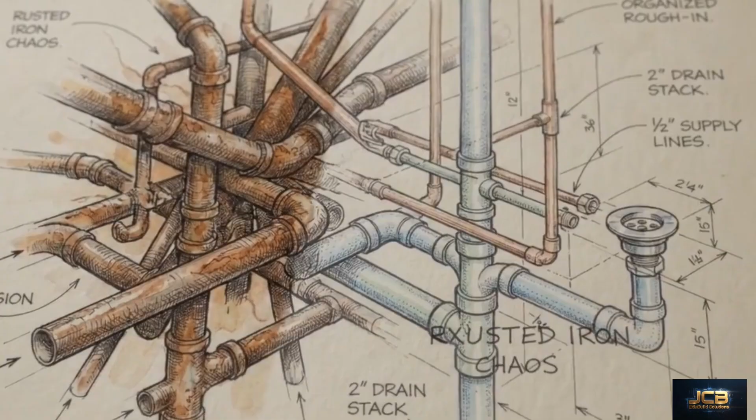A plumbing system built from unverified, unmarked pipes carries the constant, invisible risk of a sudden, catastrophic rupture.

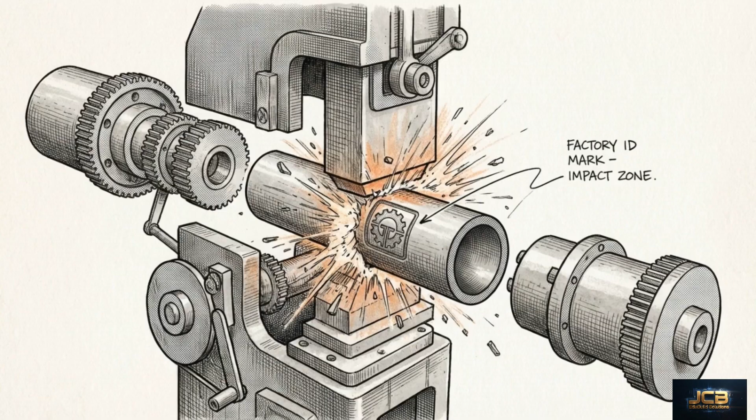Chapter 14 functions as a logical system, where the specific application of a material dictates its required physical properties. We begin with the first column, identification. Material compliance begins at the factory, long before the components ever reach the job site. Section 1401.1 establishes the baseline requirement. All pipes, fittings, and fixtures in a plumbing system must be free from defects.

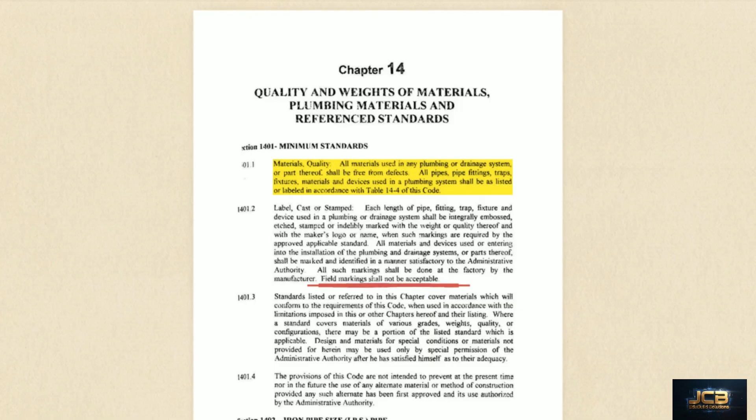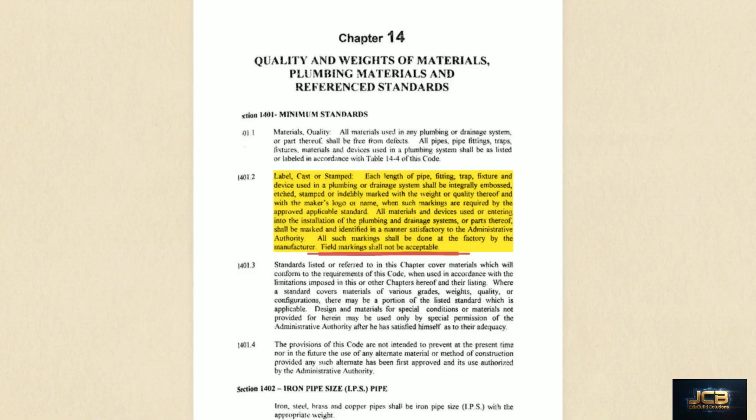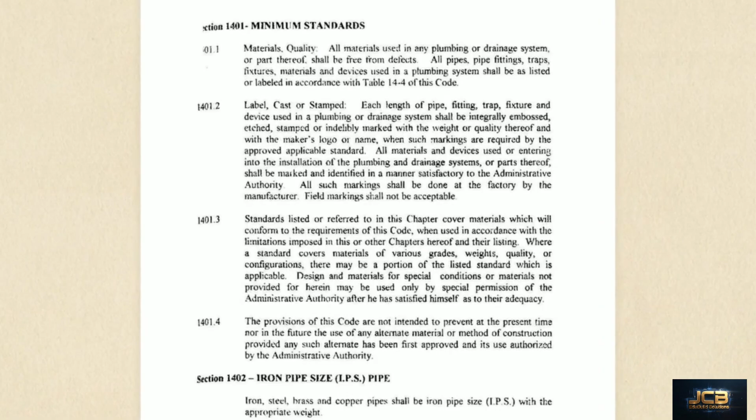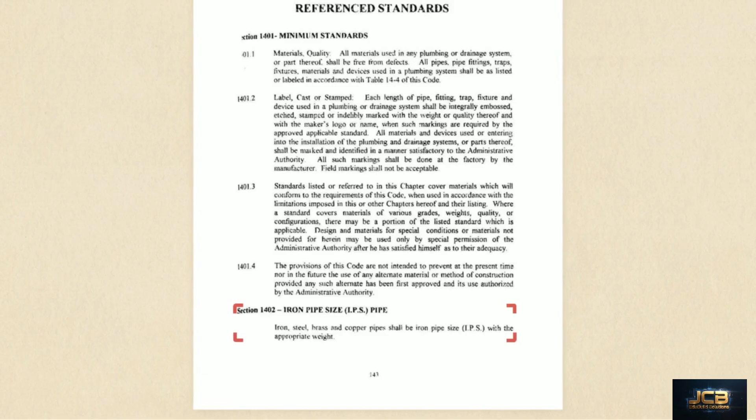According to Section 1401.2, every component requires an integral factory-applied stamp or logo that identifies its weight and quality. This is a critical point for the exam. Field markings are strictly invalid. If the identification wasn't applied at the factory, the material is a high-risk liability. Section 1402 introduces the iron pipe size, or IPS, standard. All iron, steel, brass, and copper pipes must conform to these universal dimensional and weight baselines.

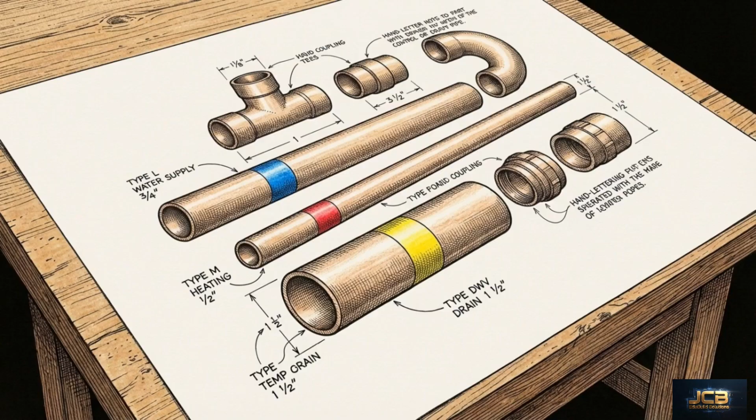We can now lock our first column. Identification requires a factory stamp and IPS weight conformity. Without these factory-verified markings, a material cannot prove its origin or its ability to meet the code's safety thresholds. Next, we move to column 2, specific materials. In Section 1403, we see that for copper tubing, the color of the factory stripe determines its legal use.

Section 1403.4 mandates a continuous, indelibly colored stripe for hard-drawn copper, green for type K, blue for type L, red for type M, and yellow for type DWV. For drainage and vent piping, Section 1403.1 permits type DWV copper, which is identified by the yellow stripe. Potable water supply requires a heavier wall thickness to withstand pressure. Section 1403.3 sets type L, the blue stripe, as the minimum requirement.

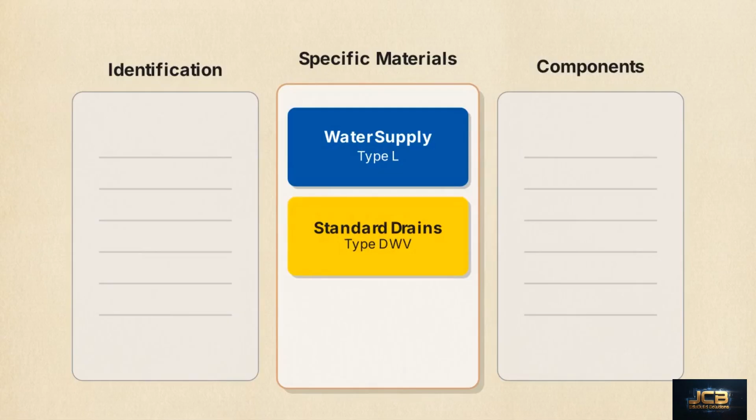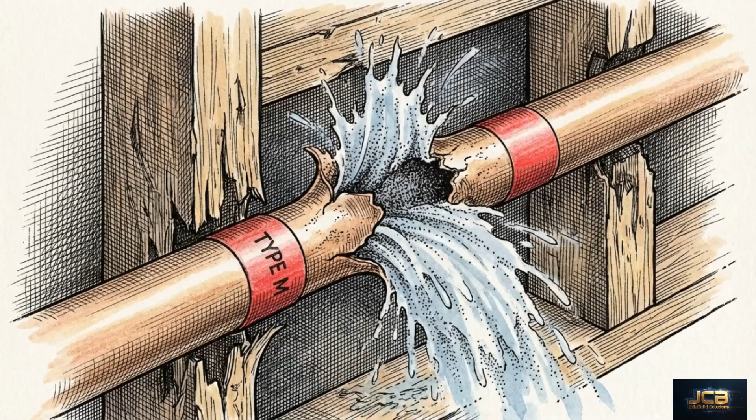Type M copper, marked in red, is restricted. It can only be used for water piping above ground or underground if it is provided with an approved protective coating. Section 1403.2 specifically prohibits the use of copper for any piping carrying chemical or industrial wastes. We update our matrix with these coding rules: blue for water supply, yellow for standard drains, and red for specialized coated applications. For copper installations, the colored stripe is the governing indicator of legal use. Using a red type M where a blue type L is required creates a significant compliance failure.

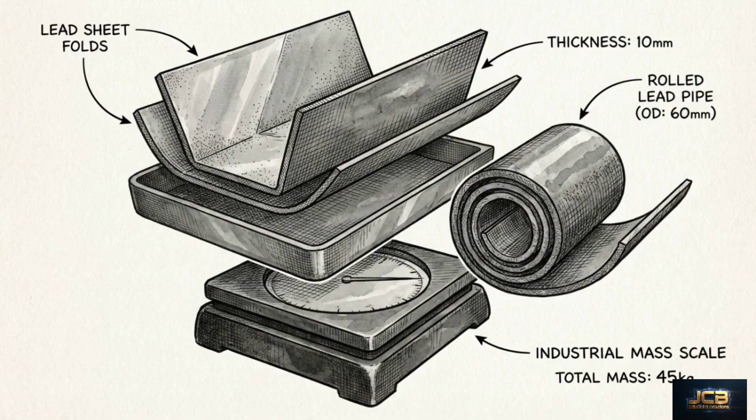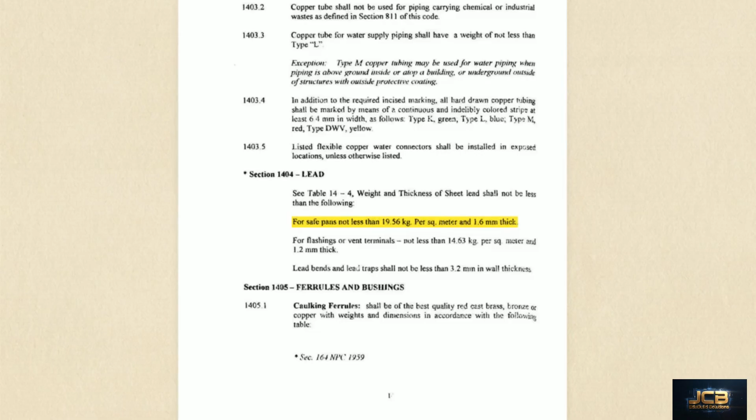We continue in column 2 with lead. Section 1404 establishes standards built around minimum density to ensure corrosion resistance. Lead-safe pans must meet a high-density threshold of 19.56 kilograms per square meter and a thickness of 1.6 millimeters. Flashings and vent terminals, which face less mechanical stress, have a lower threshold, 14.63 kilograms per square meter at 1.2 millimeters thick.

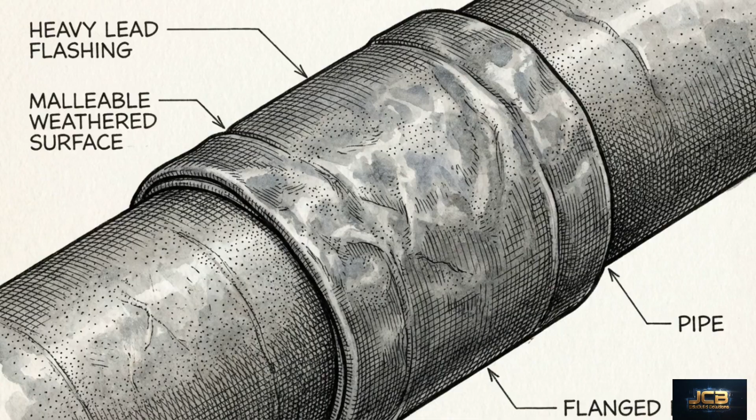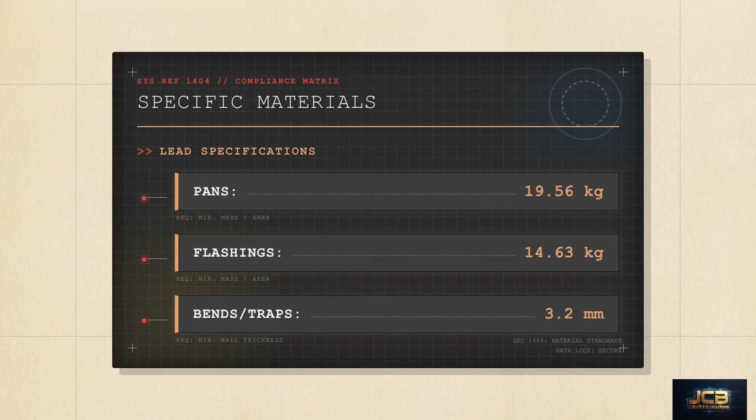Lead bends and traps require the most protection, with the code mandating a minimum wall thickness of 3.2 millimeters. We add these mass thresholds to the matrix: 19.56 kilograms for pans, 14.63 for flashings, and 3.2 millimeters for the walls of bends and traps. Because lead is inherently soft, the code uses these density requirements to prevent structural failure at critical nodes in the system. We move to the final column, components.

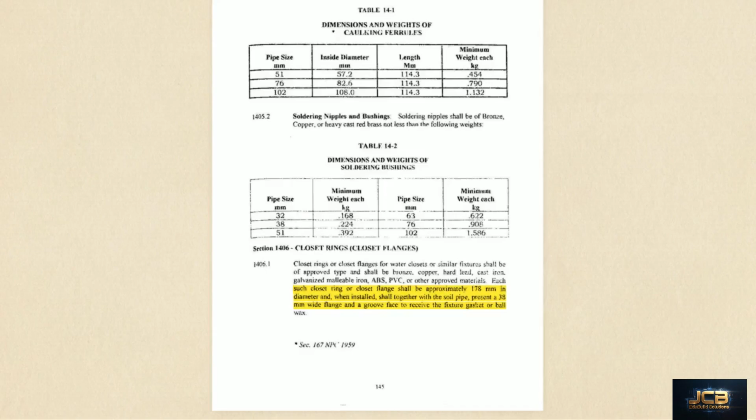These are the interfacing nodes where fixtures and controls meet the piping network. A compliant closet ring must meet specific dimensions, a diameter of approximately 178 millimeters with a 38 millimeter wide flange. These rings must also feature a groove face designed to receive the fixture gasket or ball wax, ensuring a gas-tight and watertight seal. We also look at valve bodies in Section 1410.

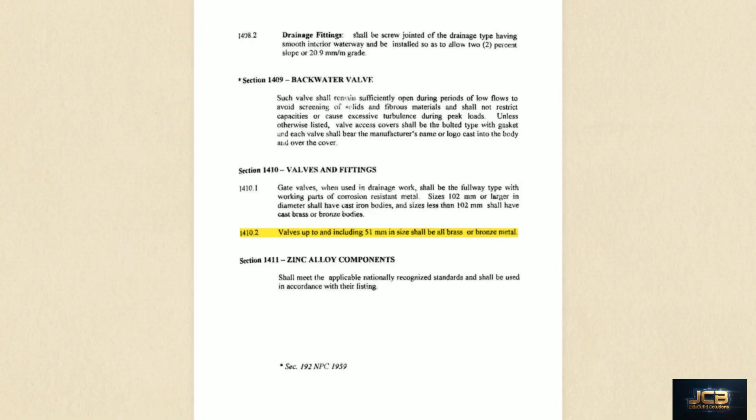Here, the diameter of the piping determines the required material. Section 1410.1 specifies that gate valves used in drainage work that are 102 millimeters or larger must have cast iron bodies. For sizes smaller than 102 millimeters, the valve bodies must be cast brass or bronze. Finally, Section 1410.2 requires that valves up to and including 51 millimeters must be made entirely of brass or bronze metal. We finalize the matrix: 178 millimeter closet rings, cast iron for large valves, and brass for small diameter controls.

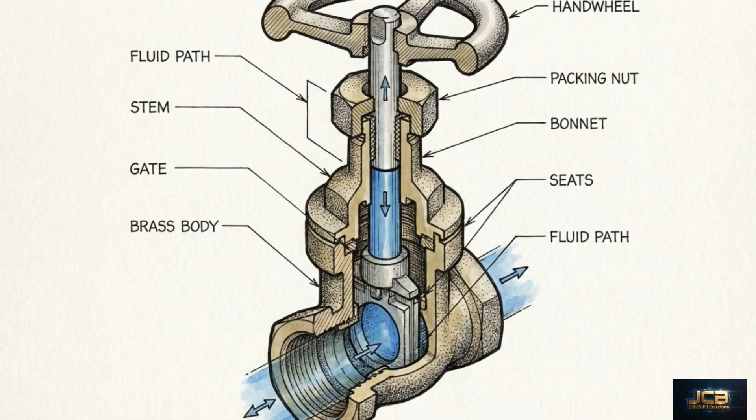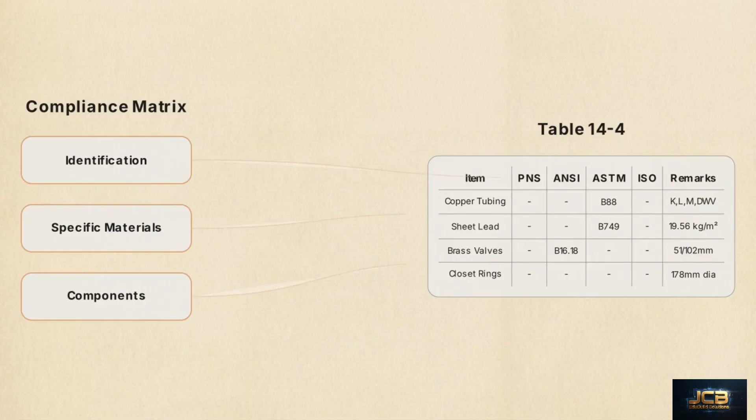The volume of flow dictates the necessary strength of the valve body. Larger systems require the rigidity of cast iron to maintain structural integrity. This completed compliance matrix provides a logical framework that mirrors the data structure of the official Plumbing Material Standards Table. Table 14-4 is an exhaustive list of ANSI, ASTM, and ISO specifications. It is difficult to memorize, but easy to navigate if you know the underlying rules.

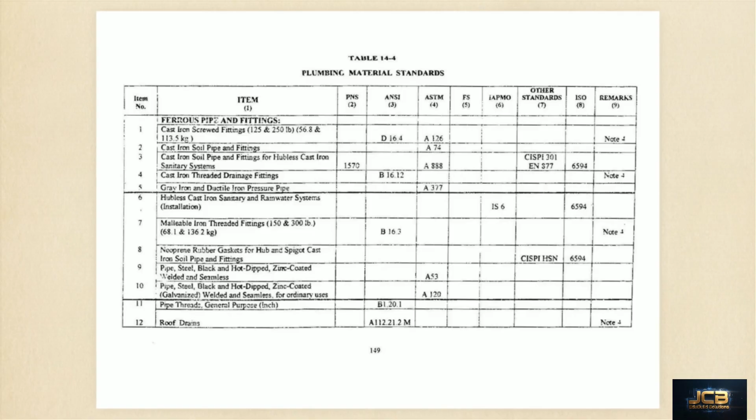Use this matrix as a deductive tool during your exam. It tells you exactly which weight, color code, or material body to look for in the tables.

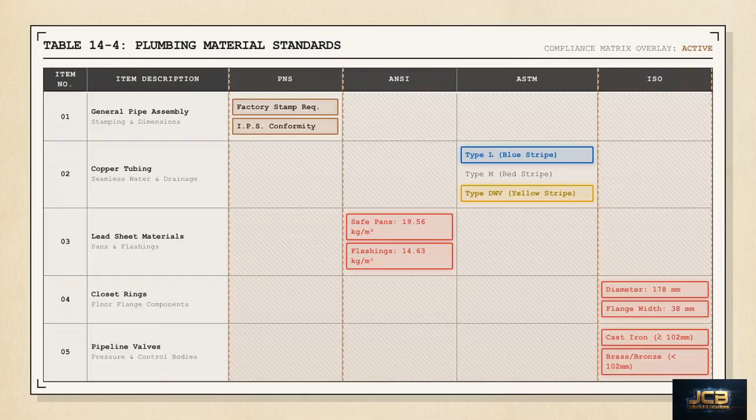Understand the fundamental technical specifications of these plumbing materials, and the right answers on your exam will naturally follow.